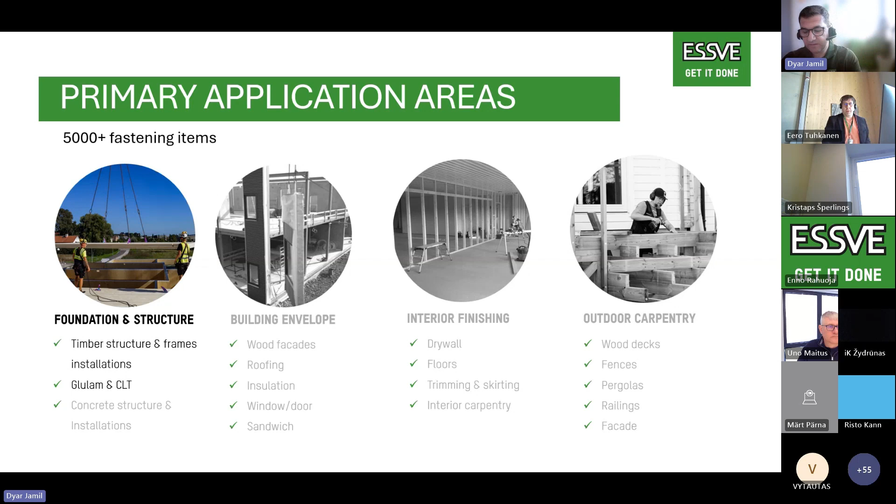But as structural engineers, we are most interested in part one, which is foundation and structure. Foundation and structure includes our second webinar, which is about timber structure connections, and we also have concrete connections, but we will talk about that in the future.

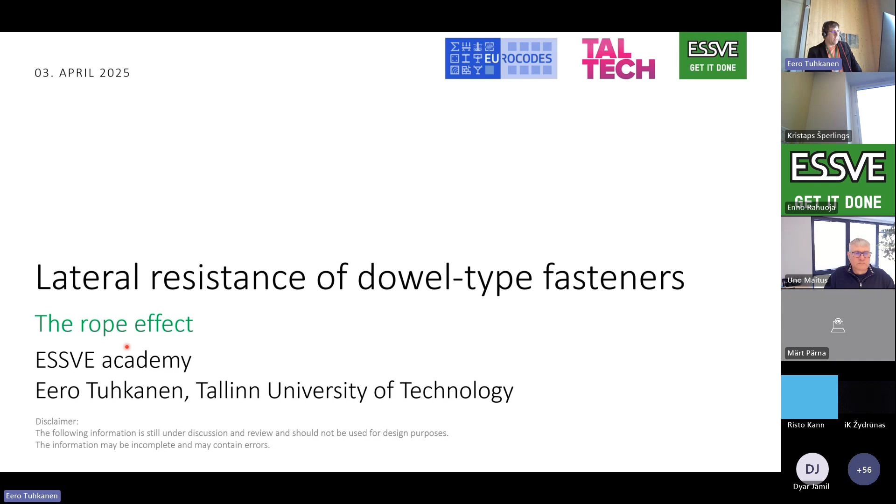For those who don't know, we agreed with ESSVE that in parallel with this ESSVE Academy, I will talk in 10-minute slots about the new Eurocode, to not give you too much overwhelming information. I will keep the topics very short. Today's topic is the second part of laterally loaded connections and the rope effect. First, I will talk about what the rope effect is and how we can use its benefits.

As we know, in Eurocode, laterally loaded connections are calculated according to the Johansen model. The Johansen model was developed already in the 60s of the last century, and these are basically equilibrium equations. It takes different failure modes of laterally loaded connections. These formulas we see in the Eurocode are somewhat modified from Johansen's original model, because in the Eurocode we also have to cover partial safety factors, and partial safety factors for steel and timber are different, so some additional coefficients are here. But we also have in this blue box the so-called rope effect.

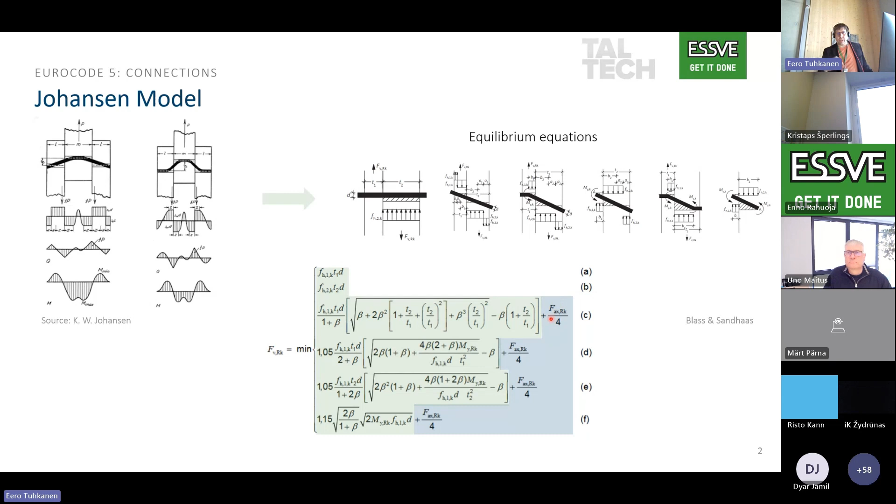The rope effect can add additional load carrying capacity to the connection, and the rope effect is there when the failure mode is like this. If we have an inclined fastener in the connection, and this inclined fastener also has withdrawal capacity, meaning we cannot pull it out from the timber, then this fastener has a tensile force in it, and this tensile force has two components. The first component is additional load carrying capacity, which is very small. This is due to the inclination.

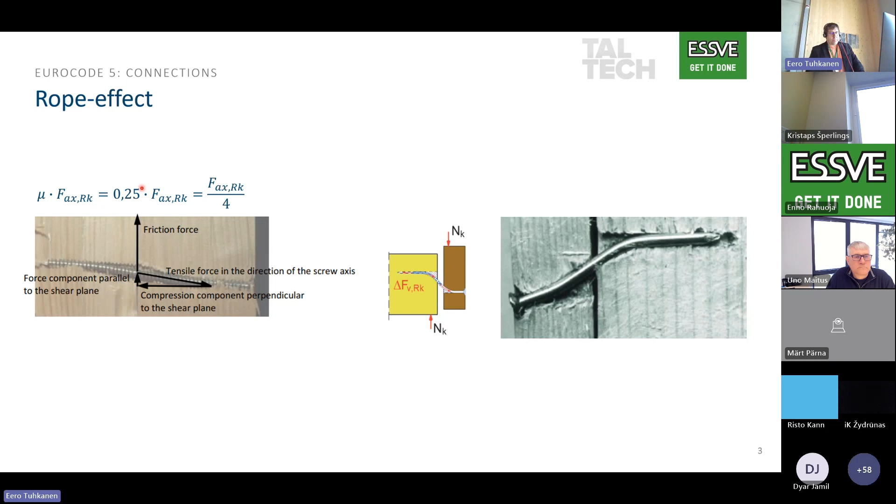The other component is horizontal, and this horizontal component causes friction between two timber parts or between steel and timber, and the friction coefficient is 0.25. That's why in the formula there is Fax,Rk, the withdrawal capacity, divided by 4. It reflects this friction force. In the first generation Eurocode, the rope effect is expressed in a somewhat confusing way, but in the second generation the rope effect is reflected much more clearly.

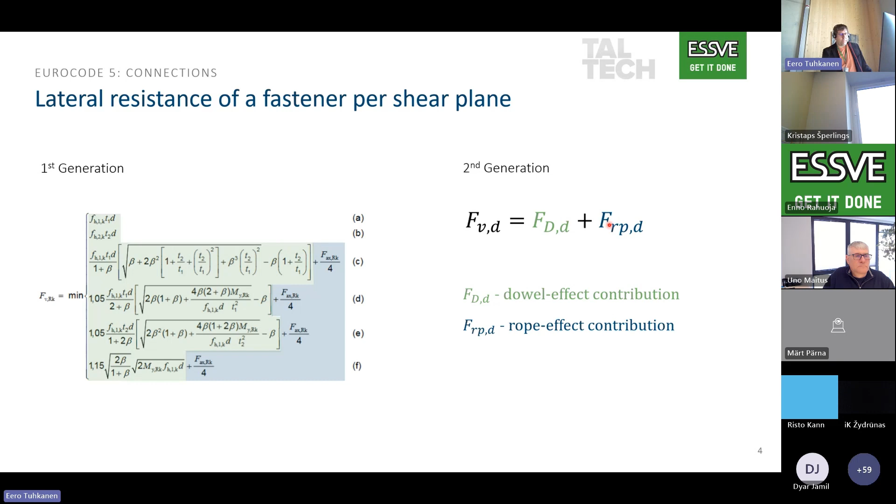Here on the right side, you can see how it's handled in the second generation. This is the load carrying capacity of the connection, and it is divided into two parts. The first part is the dowel effect contribution, which is basically the Johansen formula. These all remain the same in the second generation, and the rope effect contribution is the second part of the formula. The dowel effect contribution is handled the same way as until now, and it is available for every type of fastener, but if we are using dowels or smooth nails, the rope effect is not there, because these fasteners don't have much withdrawal capacity.

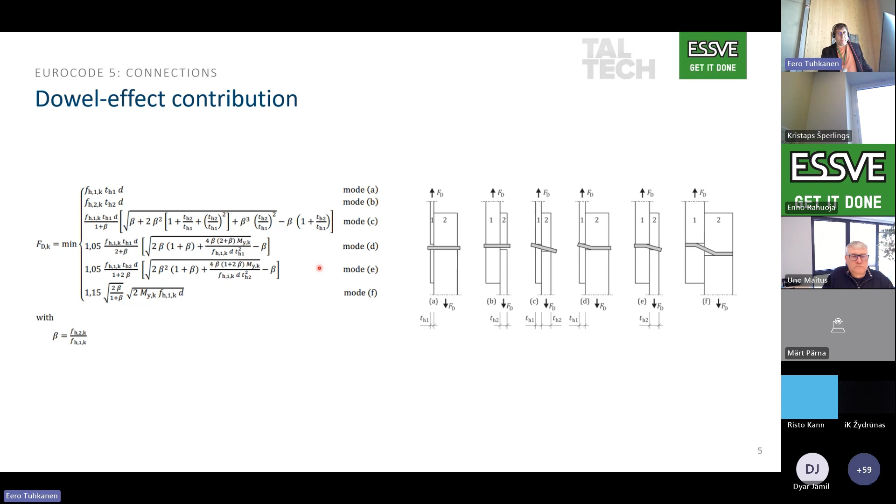But the rope effect contribution, this formula is divided in two parts to make it more clear how to handle that. And the first part here is FAX, so this is the withdrawal capacity, multiplied by this friction coefficient. And this friction coefficient is the same as we know from the first generation of Eurocode, but we also have additional coefficient for ring shank nails and coated staples. These connections show a little bit higher friction between the timber members because of this embedment failure under the nail, and we can get the benefit from this type of connections.

And the second part is rope effect limitation, and the rope effect limitation means that we are not allowed to take the rope effect contribution higher than this dowel part. So the dowel part is this FDK, as we saw here. And in new Eurocode, it's clearly said that we have to limit this part here.

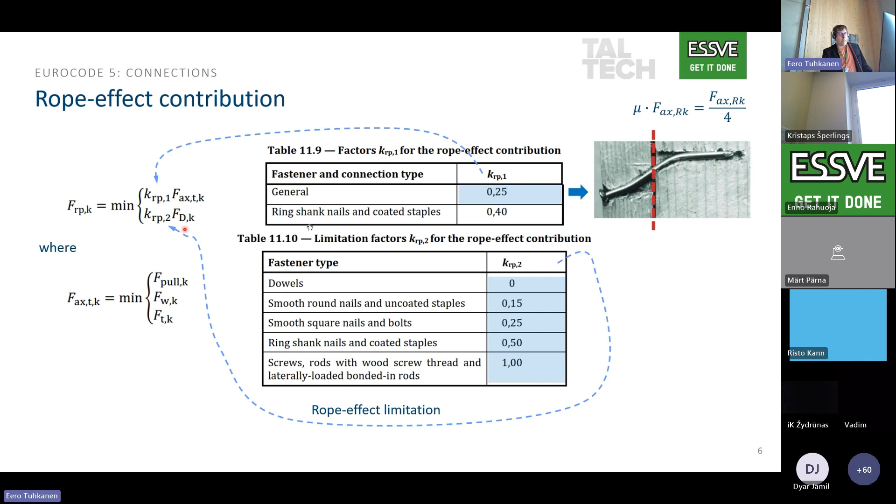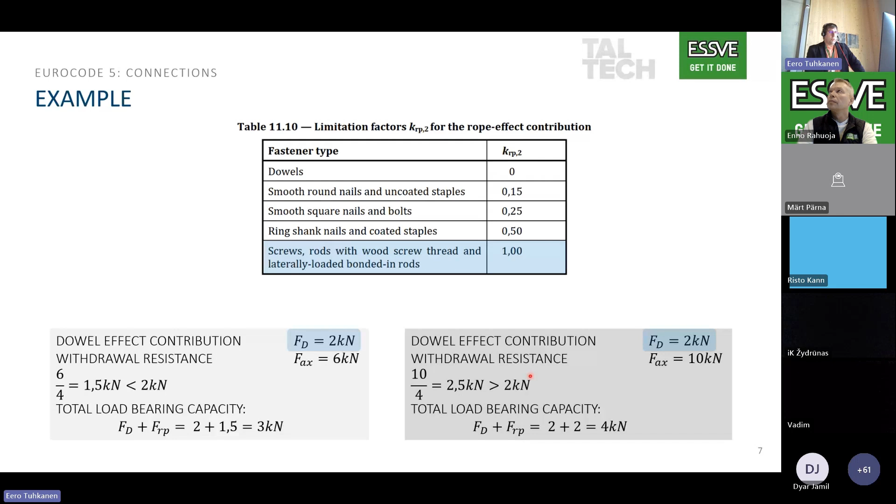So this is all for today. Next time we are speaking about this withdrawal capacity itself. So how to find this withdrawal capacity according to new Eurocode, and what is new there.

So this is all from my side. It's exactly 9 minutes and 40 seconds.

I will talk a little bit about how you can calculate it. It's going to be a demo of the ESSVE calculation program. And before we go into it, last time we lightly introduced that we also have the concrete calculation program, if you need to fix the timber to concrete. We are not stopping there. Wood is the preferred area, the day's subject.

And I have opened up here the Lithuanian website. I hope everybody can see that. We are going to enter in. If somebody shows the thumbs up, then I know that we are in. I will show the Lithuanian website here, then everybody can switch the languages.

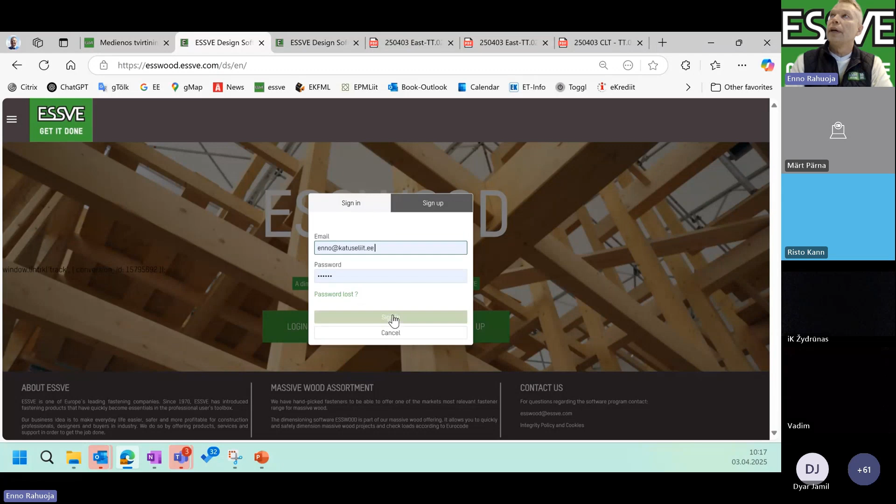And the best way to get in is you choose construction engineer. You go for timber. In the timber area, you roll it down and you find also needed info. But today we are not going to stop there. You will open up calculation mode. In calculation mode, new beginners just sign up, and log in is for already existing users. You will see here also your previous projects.

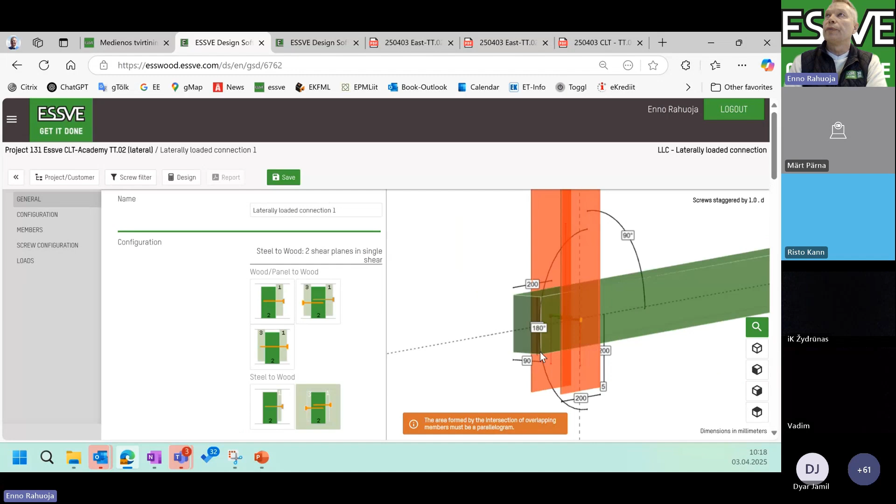So I have prepared one of the calculations here for the day's CLT Academy, just to win time. And in this part, you are able to make your connections in different ways. As last time we were talking about timber to glulam, you also have the option to choose glulam to CLT or metal to glulam or metal to CLT or metal to timber. You can have also two metal parts here, and when we go to timber connection, you can have it also with one fastener connection nicely in.

So let's look at the day's CLT application. You can choose here, is it a 45 degree or 60 degree connection?

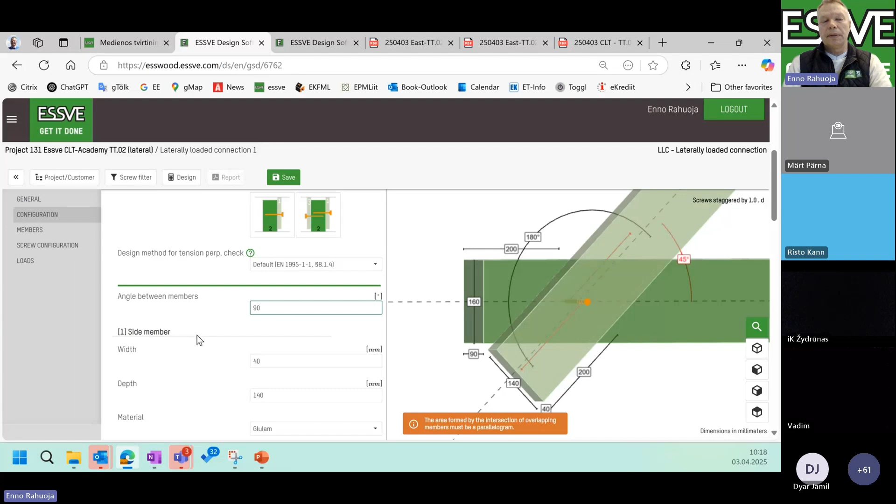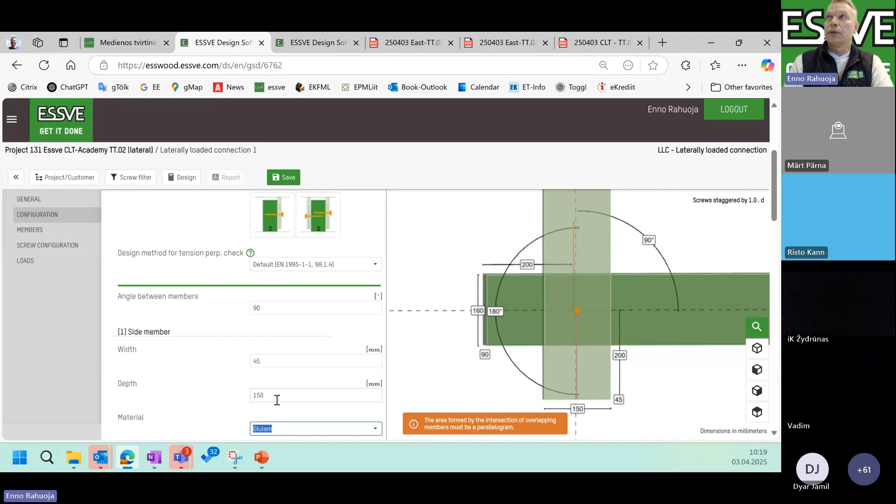I will probably demo you a 90 degree connection. Here you can add in the timber parameters. You will see that the parameters will be visualized also here on the drawing with the red mark. So you know that's the thickness of the wood. We can add here also the width of the wood. We can choose that the wood is not glulam, but it could be a timber. Timber, you can also add here a quality class in it.

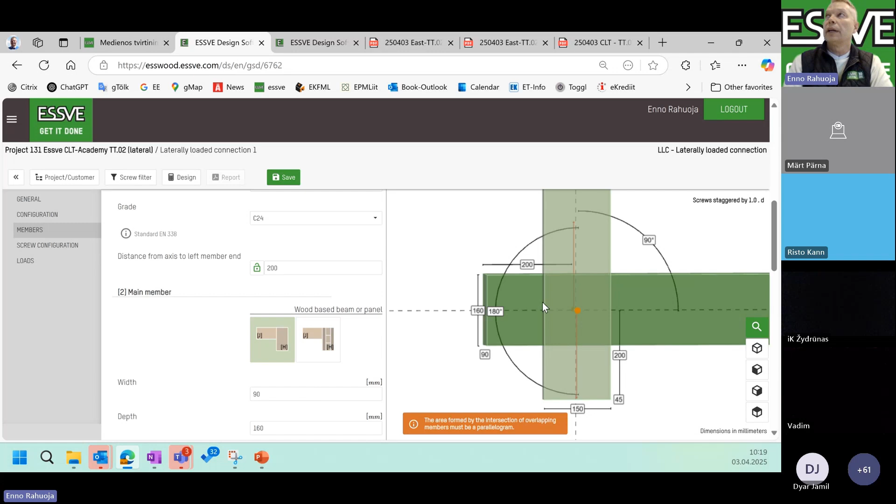That measurement is important, especially when you do the angle connection, that it's long enough that it passes the member of a construction element. Here you can choose then, is it a glulam or a timber connection on the main construction area, or it could be also a CLT area. Now, when we choose the CLT in GLT area, we are able to also locate the timber. So we can locate it, is it horizontal on visible level, or is it vertical on visible level?

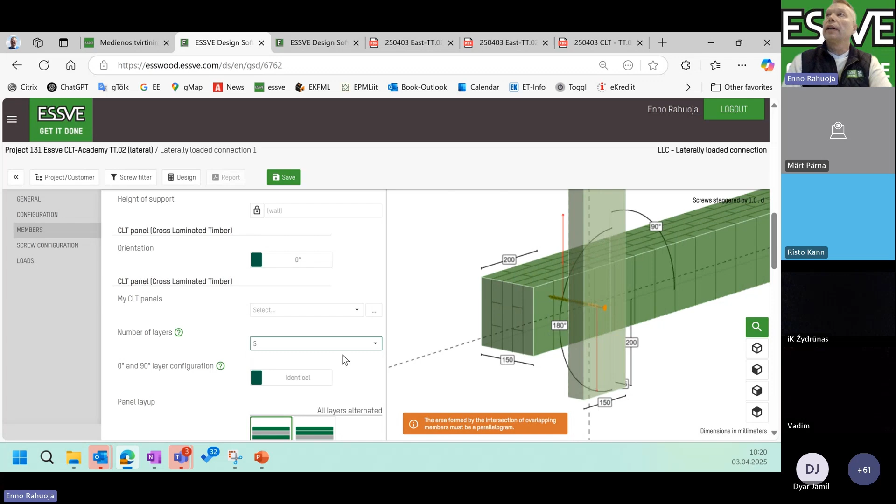You can also add here layers. Let's say we do it. We are in 5 layer level. And if we talk about here a differentiation, you can also have a different thickness of the layer. I will take that as a sample. Then you can have those also not harmonized. So they are always horizontal and cross, but you can do it a different way.

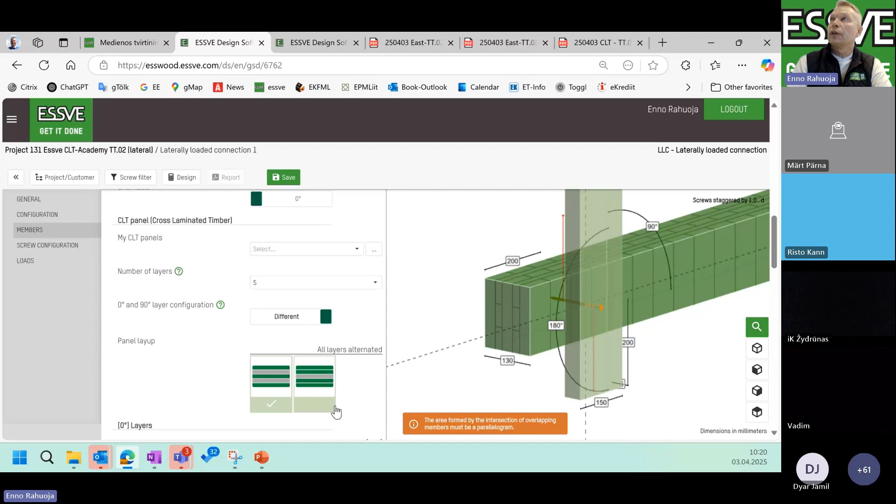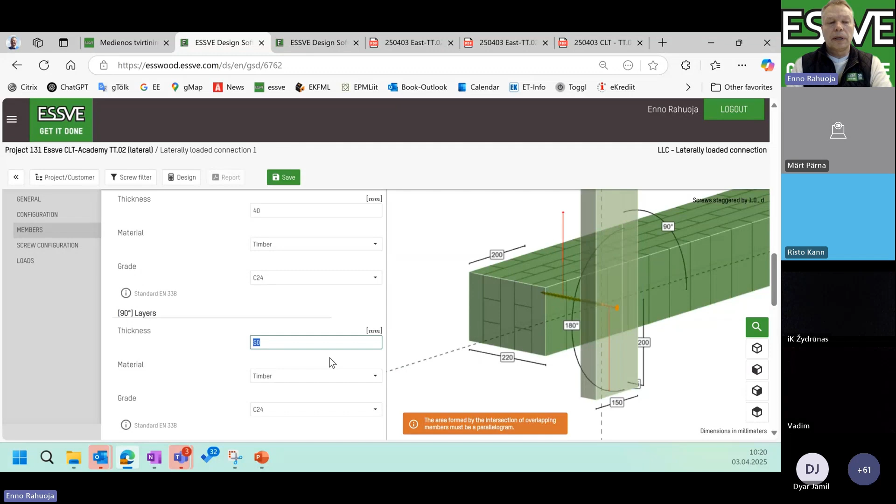And when you have chosen that it's a not harmonized connection, then you are able to here also select different thicknesses, let's say that could be 40, and you can choose here a timber. Another one could be 50, maybe. So you could use the timber you want. Normally here you're gonna use a thinner one. You can have different quality levels in it. So you will get your specification, and if you want, you can also rename it with your brand name. So in the future it's easy to pick it up as a favorite option.

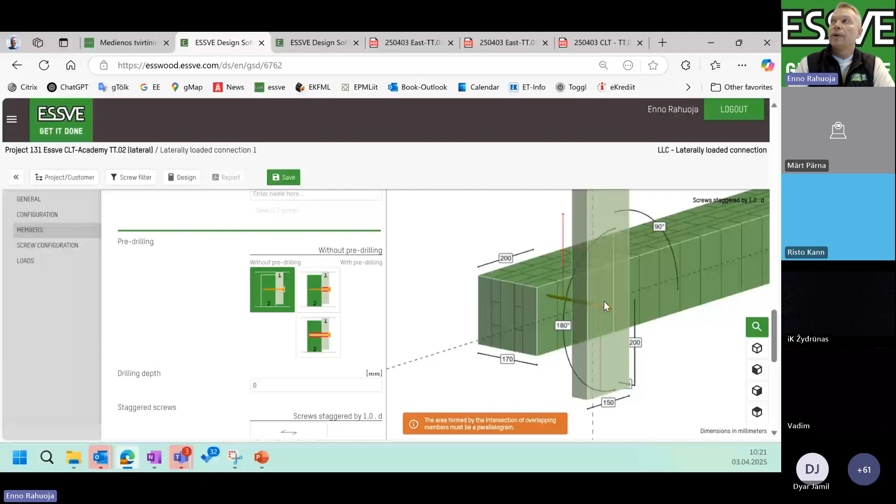Here in subframe construction, fixing to the main beam or element, you can choose also, is it a pre-drilled hole only for fixing material, or is it a pre-drilled hole for the whole screw? Which is also a positive thing here. You can also choose here, for example, in thicker construction elements, that you will hide the fastener head in it. So it will take it in the calculation as well.

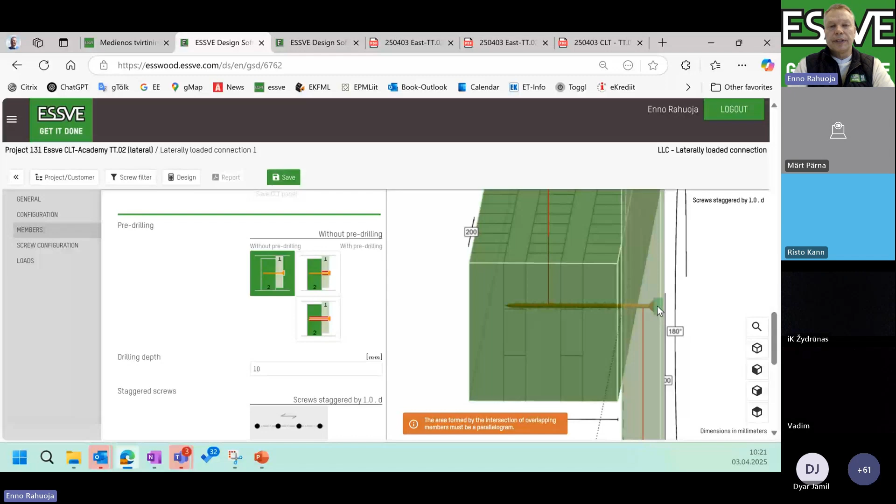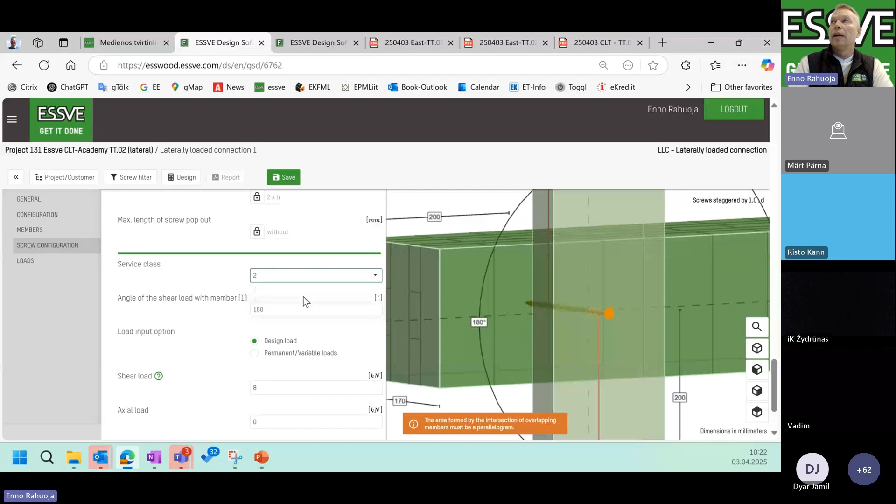So if you wanted to make, let's say, a fireproof fixing, hide the connection in the wood, put the wooden plug on top of it so you don't have any fixing visible, then you can bring that as well in the calculation. I at the moment leave it out because we have such thin wood. We have only 45, but if you're gonna have a thicker one, we could use that. Then the fixing point itself, is it cross or is it zigzag or lined up? And here you will choose your service class. Is it 1, 2, or 3? So if you're gonna have it in an external protected area, it's normally 2.

If you wanted to change the direction of the load, at the moment it's downwards, then you can change it to 0, for example, and then it goes upwards, or you can change it to 90 degrees, then you go sideways, so it's up to you. Let's say we're gonna have at the moment the sub element at 180 degrees, which is pushing that load downwards. Then you put your design loads, and when you have the axial load as well, then the axial load will be visible here with the arrow point. So you will find it there as well. And this is the way you will get it.

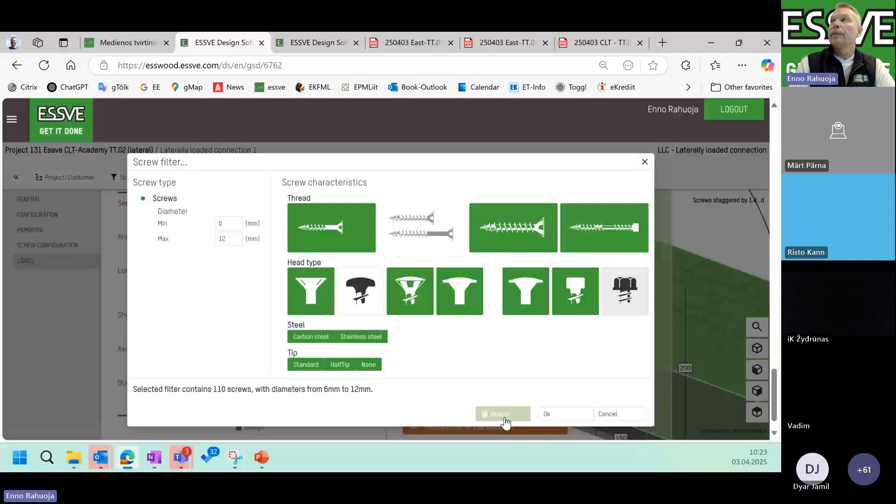And you have another option as well, where you can select, if you already know that I want to use only a hex head, then you leave the rest of them out. If you wanted to leave out, for example, all the pan heads on those connections, then we can do it. We make here a design. And it brings you a whole lot of fasteners for the selected choices.

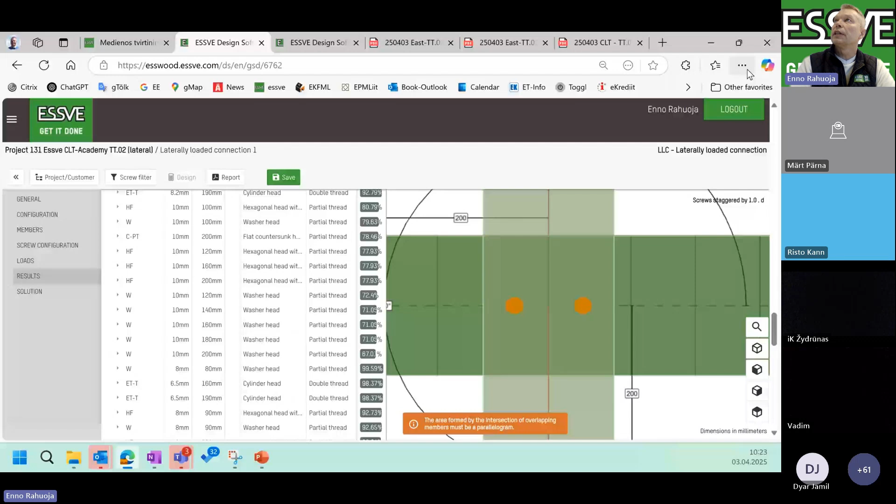Let's put it so that I will look here a little bit closer. So you will see that I want to have a safer connection, which means that it's not only done with 2 fasteners. I want to have maybe more fasteners in it. Then I can look here at 4 or even 6 fasteners. Let's say I will select here 6 by 100.

Then you're gonna have here also the opportunity to select which way you do this connection. So you have a choice of 3 fasteners, or you can have 4 fasteners in a row. So you are able to make here also a selection of which way you want those connections visualized. There is also another option at the top level, in the filter area, where you can choose only a 6mm screw or only an 8mm screw; you can do it here already.

So we stick here at the moment with diameter 6, and we are going to see what is the report area. Before we go to the report area, I say that you can also customize here to put the project name in, what is the address. You can also add here a customer name, and then you will do your report printout, and the report printout you can deliver and save for your archiving.

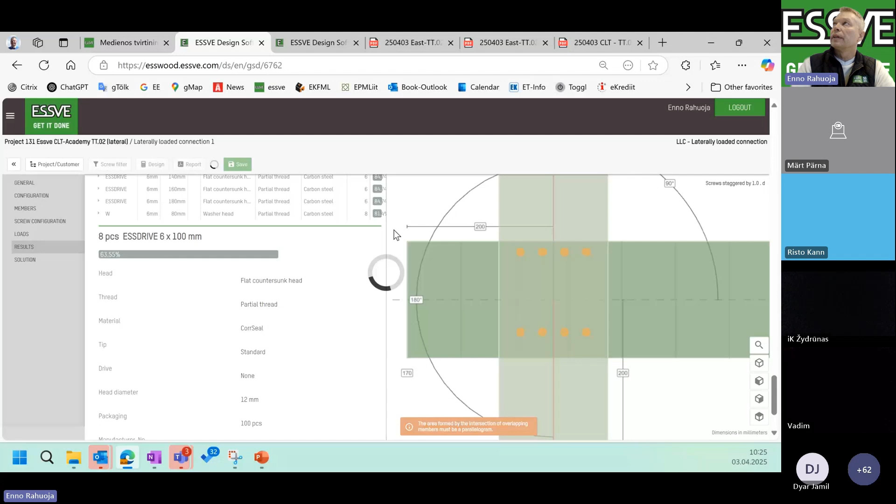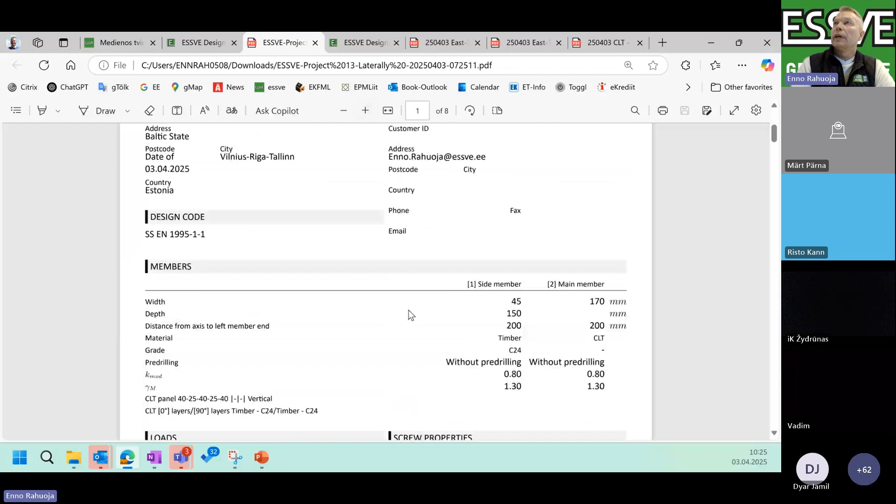So this is how the report will look. You will see here the needed info. You will see also the info about the side member and main member. You're going to see also the loads and directions and fastener properties. If you go below, you will see what the calculation is made of. This sheet you are able to deliver to your construction site, so the installers know how to make the correct installation.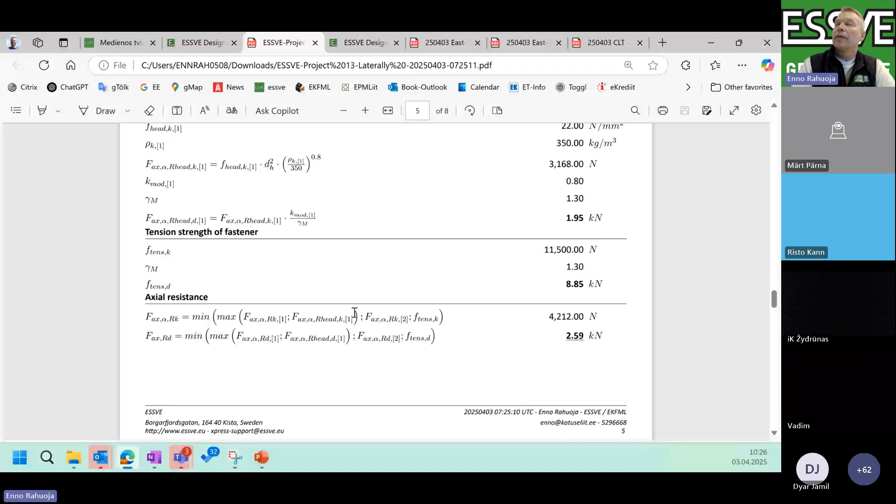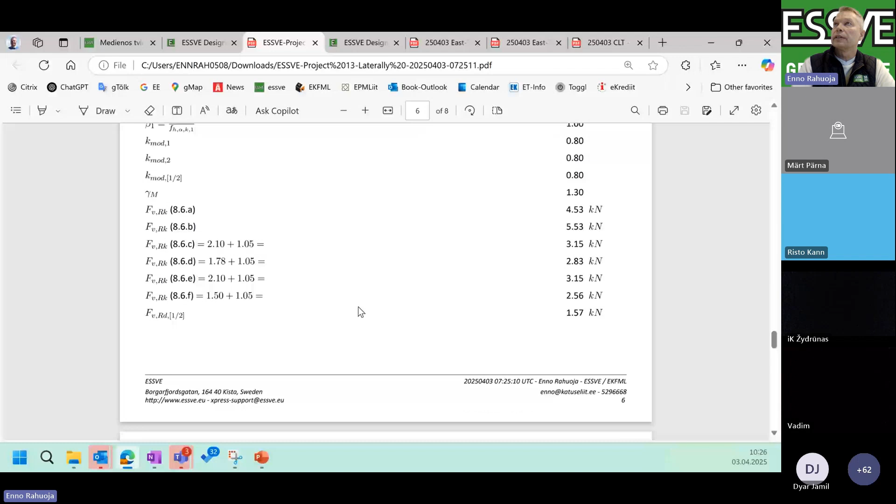Here will be also the parameters for pre-drilling. And here is the info on the technical side, what the engineer needs. Based on the time today, I'm not going into the details, but you are welcome to come back and ask all the questions. The points Eero touched, all are in here. So you are able to do your checks and controls. Previous time, Eero was also talking about the failure modes here with the ABCDEs. So when you select a different diameter of fastener, you will also get a different result. From my side, yes?

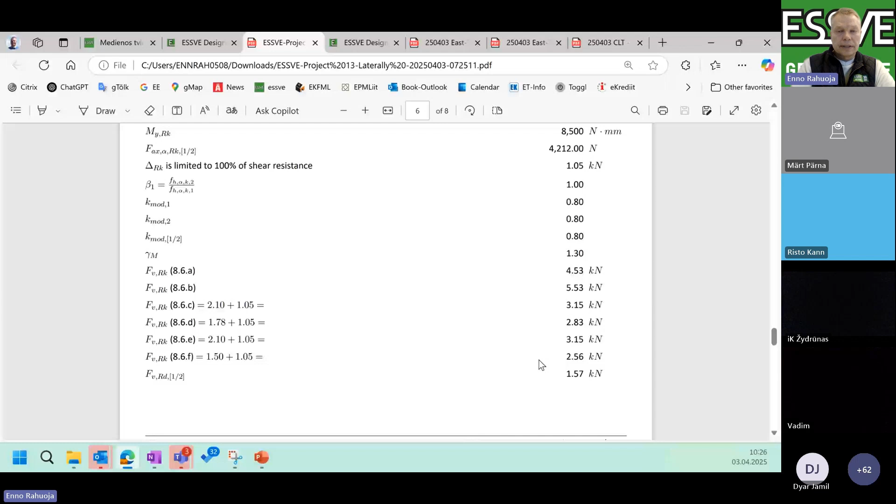Enno, if you scroll up a little bit, a little bit down, more. You mean here? Here, yeah. What's important to understand? We have the rope effect, which Eero talked about. You see that you can just click on it. It's 4.212 there, and we divide by 4, and we get 1.05 kilonewton for every screw, for every fastener.

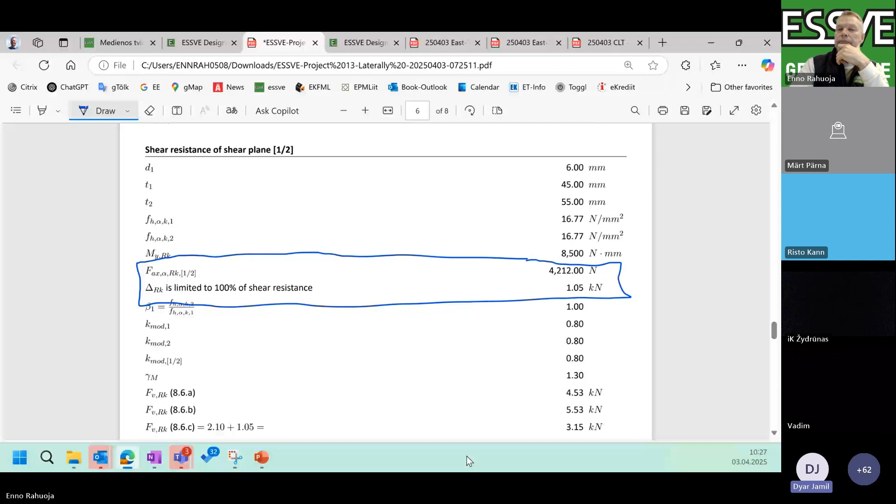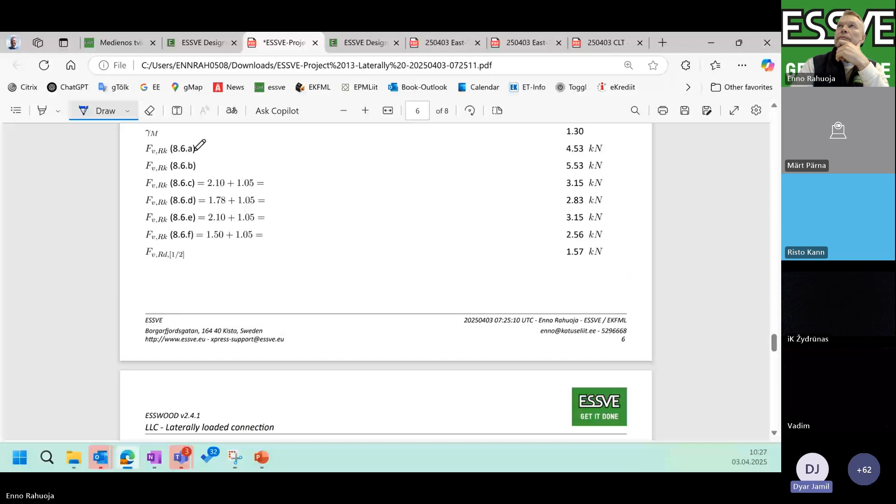If you scroll down a little bit to the result, here you can see FV from 8.6A to 8.6F. You see the last 4, you have almost 1.05 kilonewton extra capacity for every screw, which means you will get almost 30% extra capacity. And when you have almost 10 screws, you will get almost 10 kilonewton extra capacity, which is very great when you do your calculation and optimization for the connection. It will be much less if you ignore the rope effect.

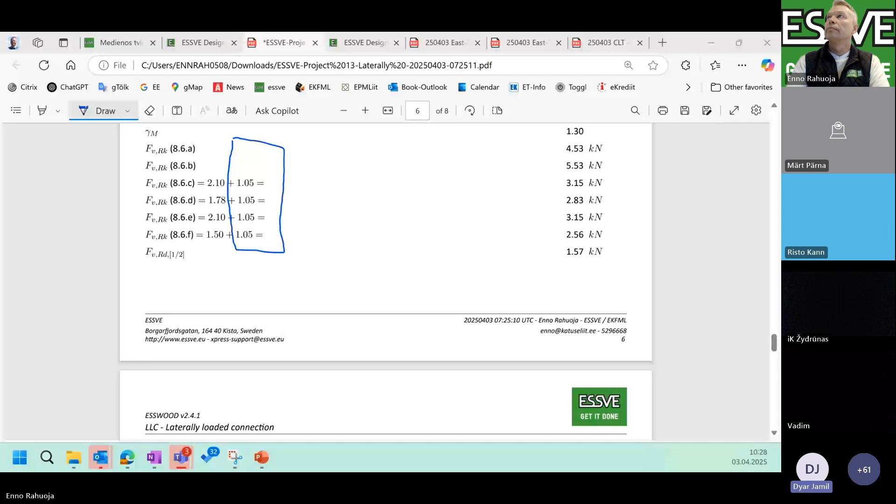And if you scroll up a little bit, Enno, a little bit more up, more, here, down, down, here you see how the calculation is done for the rope effect. We take the minimum capacity from the F withdrawal capacity, the first one, the F pull and the F tensile. If you have a fully threaded screw, the F withdrawal capacity will be the decisive one, which was 4.212. This is the value which decides the capacity for the rope effect.

And can I say, the withdrawal capacity value depends on which tests every company has done. We are responsible for the F withdrawal capacity that we have in ESSVE. And because of that, you get the final result with almost 30% more capacity for every screw.